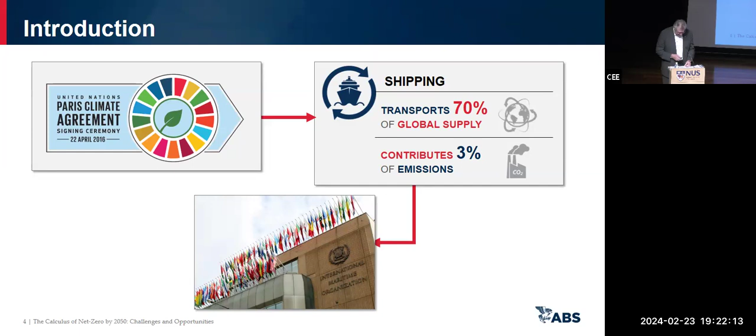So you're going to hear a lot today. We're going to be talking about a new language of shipping. We're going to be talking about what the calculus of net zero by 2050 means. We're going to be talking about CO2 and greenhouse gas emissions per ton mile, dollars of CO2 and greenhouse gas emission reduction per ton mile, and CO2 emission per transport work.

We're probably also going to be talking about a whole new color scheme for those that aren't aware of it: gray, blue, green, and pink. We're in a really exciting time, ladies and gentlemen. We're really in the early innings of a decade of change.

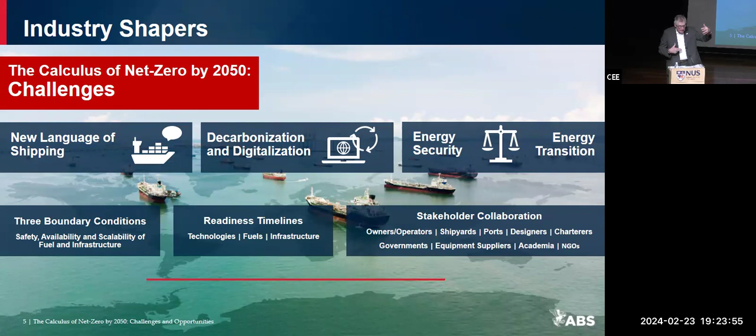We're talking about decarbonization as well as digitalization coming together to probably be the two most transformative technologies that are going to affect us. We're talking about a new set of boundary conditions: safety, availability, scalability of fuels, and infrastructure. We're talking about new timelines, a lot of very interesting things, even new relationships and partnerships. We're not talking just about the ship, we're talking about the ship and the port. We're also talking about new public and private partnerships. So there is an awful lot going on as we begin to prepare ourselves for this journey to 2050. Let me talk a little bit about where this starts.

Regulations driven by the IMO, which is essentially an arm of the United Nations responsible for setting global regulations for shipping, since shipping is essentially a global industry, has already started to address what are those signposts and outposts that we need to look at as an industry to begin making investable decisions to get us to where we want to get to.

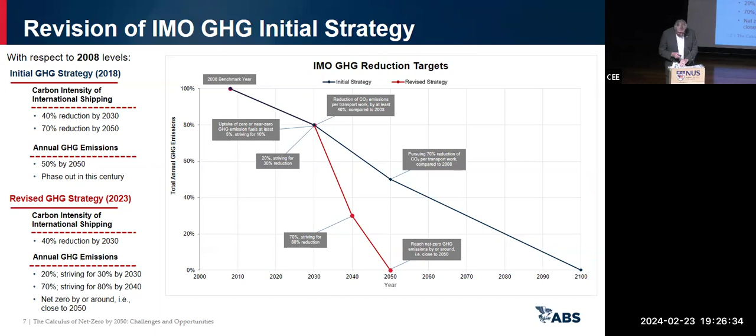In this process that supports these regulations and this journey, we're going to talk about how we're going to move down that red line. IMO has also introduced several markers on the table that are going to help guide us, help us implement the programs, and hold us accountable as an industry to see how we actually drive change. We're going to talk about a couple of them here. There's a lot, but the two that I think are the most important are the EEXI, which is the Energy Efficiency Existing Ship Index, and CII, which is a Carbon Intensity Indicator. They introduced some other things relative to well-to-wake emissions, and there's some things like market-based measures. But I wanted to bring these two out because these are the ones that I think really begin to impact operations and design.

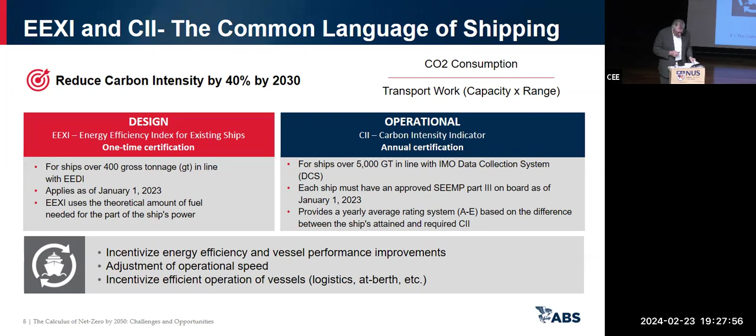Both of them are based on a relatively simple equation. In the numerator, it is CO2 consumption, and in the denominator, it is transport work, which is really a function of capacity times range. The way this works, if you are a ship owner or you look at the global fleet, the EEXI is essentially a one-time certification benchmark that kind of sets the playing field. And what happens is, as the industry moves forward, all eyes and attention are drawn on the carbon intensity indicator, because that is now going to be measured on an annual basis. The industry and ship owners are going to be required to report that and send it to the governments and regulators in order to show whether they are in compliance.

What has happened in this industry is the CII is not just a regulatory compliance mechanism. What we are seeing now is that banks, insurance companies, different parts of the industry are also embracing CII as part of either financial requirements, if you are financing an asset, or if you're looking for a contract, let's say from a charterer. The most important thing to take away is this carbon intensity indicator is going to bring the entire industry together, and it is going to be the mechanism we use to make decisions, whether it's how you operate a vessel, how you design a vessel, the selection of fuel type, or technology for retrofits. All of it basically boils down to this CII indicator. Very, very important.

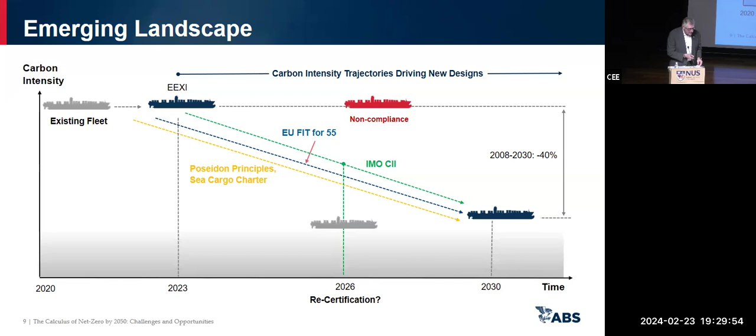The last thing I want to say about regulations - one of the things happening is that regulations now are not just compliance requirements, they're actually becoming global shipping shapers. This is the first time we've really seen that in this industry. This regulatory framework that ships are subjected to will have key elements and key timelines. There is a governance element, and the challenge for all of us is how to sync it, because you have international requirements, which is IMO, but also national, regional, and local. The challenge for shipping is to bring all those together, because in the absence of syncing this up, this fabric will not work.

We have international regulations, we have regional regulations - the EU, the US, China. Everyone is now stepping together. So the challenge for the industry, aside from just what happens on the ship, is how do you bring all these regulations together to provide one synchronized roadmap for shipping with one timeline.

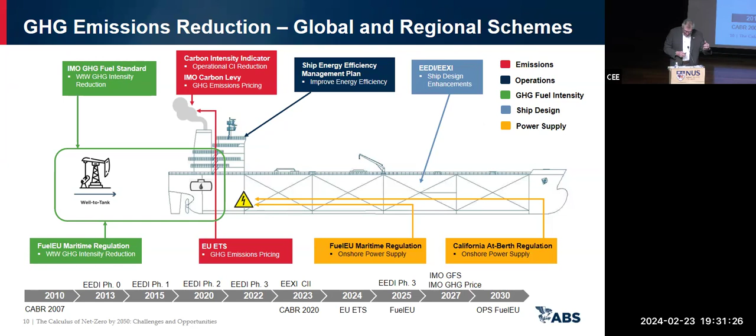So now let's talk about what it's going to take to get to net zero by 2050. I'll tell you that when you look at the red line, that roadmap that came out of IMO in 2023, getting to 2030 is actually quite achievable. We have a pretty good clear line of sight. We know where we're going.

Mark raised a good question. I don't know how many hands were behind me, but to get to net zero by 2050, at this point - and you'll see this over the course of this lecture - it's at best directional. There is no clear line of sight for us as an industry to get from where we are to net zero by 2050. Just a lot of pathways and a lot of work that has to happen.

To give you a sense of the urgency of the problem and the magnitude of the challenge, here are some statistics. From a fuel point of view, to get to net zero by 2050, we'll need a combination of probably 70% zero carbon fuels and 30% carbon neutral fuels. Now, 70% zero carbon fuels means we need 10 times more renewable energy than we have today. 30% carbon neutral fuels requires us to have 100 times more carbon capture capability than we have today. We'll get back to these terms and what they mean, but this is pretty significant when you look at what is defining the steepness of the curve.

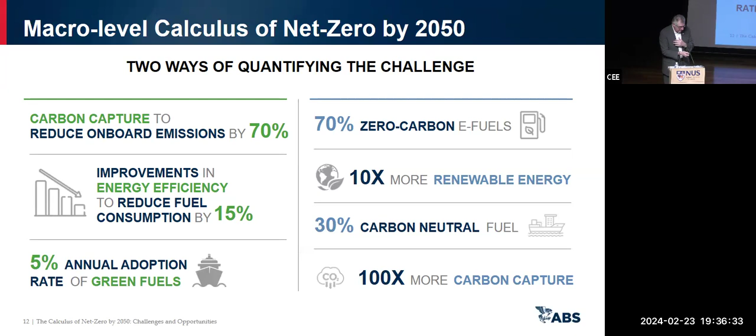If you look at this problem not from the macro perspective I just talked about, but from what I call the deck plate perspective, in terms of what is out there today, this problem basically breaks down into what I call a 70-30 solution.

Yes, 70% of the solution to get us to net zero by 2050 is the fuel, or the fuels—and there may not just be one, as we have today. 15% has to do with retrofits and bringing in new energy efficiency technology on board the vessel. The other 15% is how we use data, data science, and data analytics to help us optimize the performance of the vessel.

So what you see on this slide is that 30% of our ability to develop a solution is in our control—it's not a one-dimensional solution, it's a hybrid solution. What I'll try to do this evening is break out what's in the 70% bucket, what's in the 15% bucket, and what's in the other 15% bucket relative to data.

For all the engineers out there, what I'm going to tell you is the exciting part: when I was growing up, shipping was basically a relatively simple single-point design. Now you're looking at multi-point optimization. When I was a naval architect, it was pretty easy—you design a ship for one speed, one draft, and that impacts the whole shape, the bow, and the engine capacity.

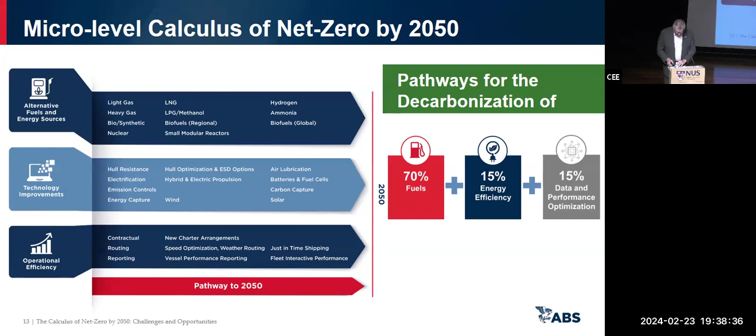Now let me continue my deeper dive and actually talk about what's behind the 70-15-15 kind of hybrid solution. We're going to talk about fuels, ship technologies, and transitions and timelines.

Ships today currently run on heavy fossil fuel. There's a C—a little bit of this story will be about molecules—there is a C in that fuel. As we look forward at what options and fuel types are available that could help this industry moving forward, what you see on the slide: it's not so easy.

There is a lot of criteria we have to meet. We have to address availability, scalability, and affordability of fuels. We have to address the infrastructure—is it there to provide the fuels for the vessels? The bunkering stations, basically global gas stations, pre-positioned all around the world, of which Singapore is one.

And it's going to require an understanding of safety—making sure that as we move into this new generation of potential fuels, we understand the unintended safety consequences of change and of these fuels.

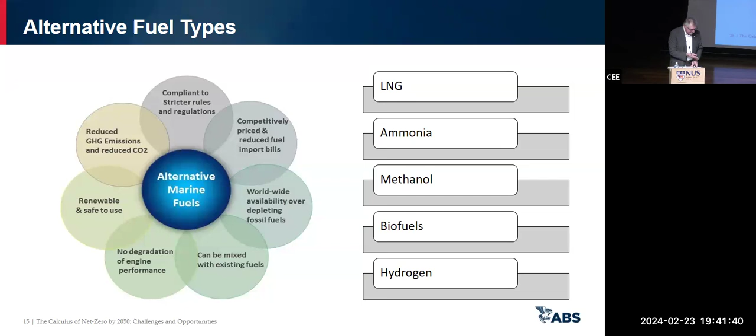We talked about infrastructure, and I wanted to talk a little more about not just tank to wake emissions, but also well to wake, because IMO now is moving this discussion of fuels past the engine room, past what in the industry is the tank to wake piece. They are now challenging the industry: you've got to pick a fuel that goes from basically well to wake.

So as we look at this compliance requirement, the greenhouse gas emissions and CO2 reduction is not just what's on the ship that the ship is emitting. It is what is happening in that whole process to produce that fuel and bring it to the ship, and that is what we call well to wake.

And then what I did here is also begin to get a sense of what is the cost in terms of impact on shipbuilding, to give you a sense of readiness and timelines. I'll say, by the way, in the shipping industry one of the big indicators for types of fuels used are the engines.

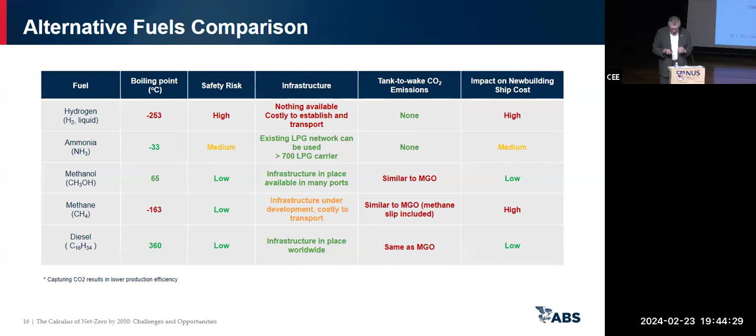So the ammonia and hydrogen currently today are what we call gray. They come from fossil fuel. And the challenge is, how do we make all this work? We will talk about ways like carbon capture, which is extracting carbon from some fossil fuel activity, and we'll look at these generations of how these fuels can reconfigure themselves.

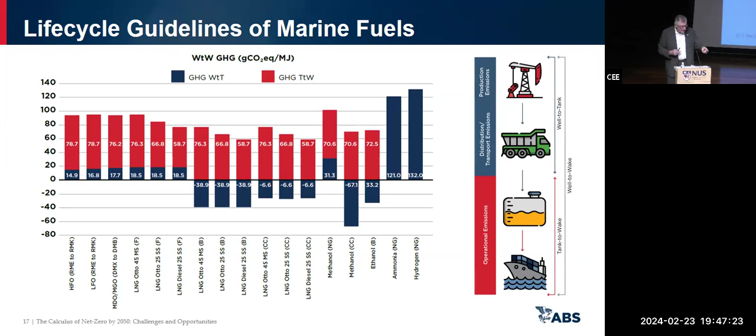The reason I bring this up is because if you are a ship owner, in addition to the requirements of compliance based on a technical equation, the regulators now are enforcing cost of compliance, or market-based measures, or dollars. So you're now also going to be paying penalties, and the penalties are focused on the life cycle performance of the fuels. Pretty interesting stuff. We're just getting started here.

Just to give you a sense of what this industry is wrestling with: if you were to order a vessel today with conventional fuel, per the requirements, that vessel can go 10 years without any rating change that would cause a compliance problem. If that same vessel was ordered with LNG, you could go 20 years. And if you used methanol, you could go 15.

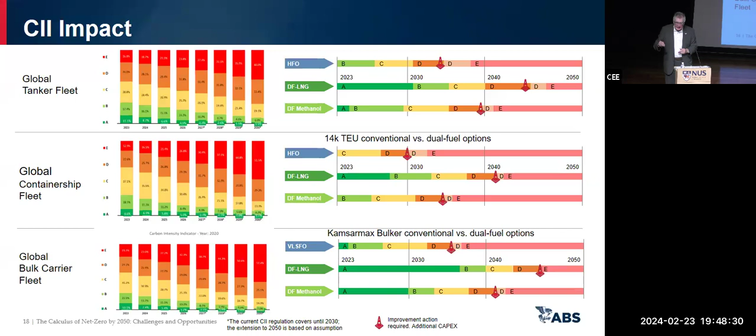The reason I'm telling you this is because from an engineering point of view, in terms of how to begin making that decision going forward, there are a lot of levers and things at your disposal to optimize this problem, not just in terms of regulatory compliance, but also technology readiness. And I'll add one more dimension: risk. We'll talk a little bit at the end about risk.

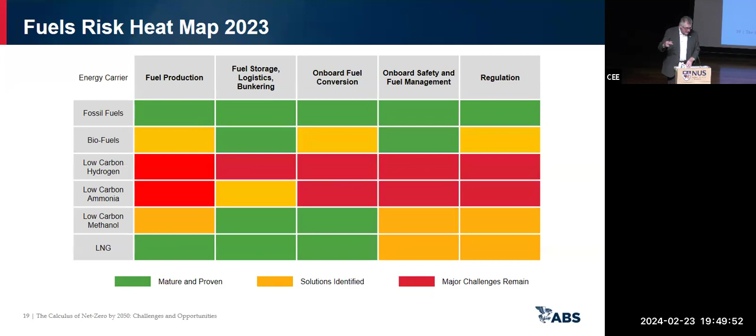When you start looking down, you will see the biggest risk challenges and the biggest gaps are with the fuels that do not have a carbon atom in there - hydrogen and ammonia. That's the challenge. So you really begin to understand, from a risk versus risk point of view relative to everything going on, how this all shapes up, and then what we need to do to manage and mitigate this type of risk.

Let me talk a little bit about ammonia safety. Toxicity of ammonia remains, I think, the defining safety challenge of this fuel. If you look into the literature, any dosage of 300 parts per million, if you breathe in any of that, it's harmful. And even as low as 35 parts per million, if you were exposed to that, it would be dangerous and certainly unpleasant.

But we have the ability to understand this and begin to see what we can do to put a fresh focus on safety in the case of ammonia. Listen, we can put a man on the moon. We can clearly begin to understand what is going on with ammonia and what that new safety environment looks like, both on the ship, in the engine room, as well as at the bunkering facility outside the ship.

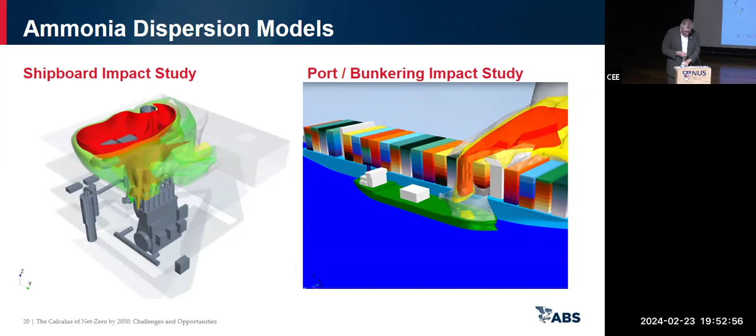So this is a solvable problem. Like everything else with these new fuels, it's a challenge and is going to require a new approach to thinking, and it's going to require all of us to really use the technology we have available to understand this. Remember, one of those boundary conditions I talked about - there are three of them - is safety. Safety, safety, safety. What are the unintended consequences of change, especially related to safety? This is a good example of what we see and what we're working on.

So that's a little bit about that 70% bucket. I've got two slides - let's talk about that 15% bucket of energy efficiency, that low-hanging fruit.

What I want to show here is that modifying existing vessels to improve CO2 and greenhouse gas emissions, in fact, can be done. You have a whole portfolio of technology you can apply today, everything from hull form improvements to reduce resistance and improve propeller efficiency, to renewable energies, to batteries, to minimizing onboard energy consumption, machinery optimization, and electrical energy storage.

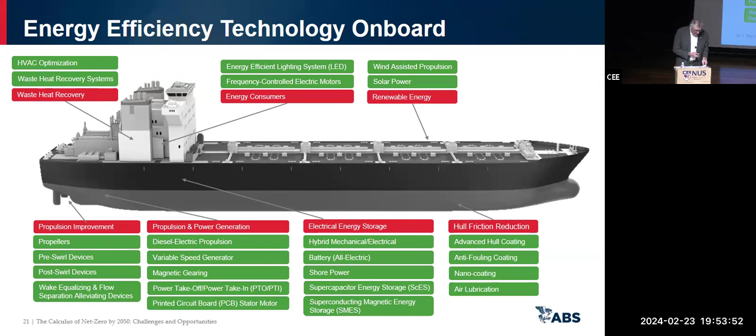Let me go right into the data piece, which is very exciting and very important: how do you bring data into this picture? From a vessel point of view, based on voyage performance and voyage optimization, you can improve CO2 reduction and greenhouse gas emissions through the combination of speed and performance, as well as using sensor information to tune a machinery component to help you out.

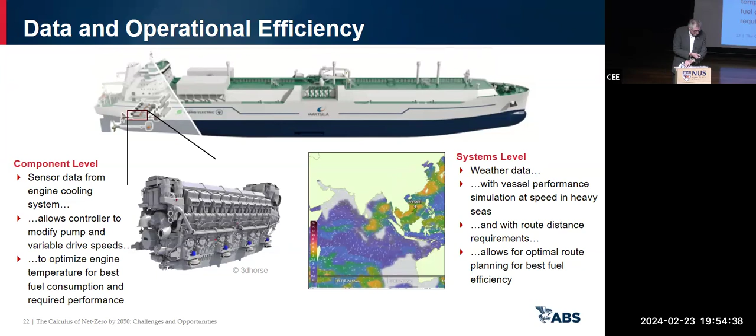So 70, 15 and 15, or that 30%, is something that can be used today. I'm going to move through this relatively quickly since I've lost a little bit of time. Let me just give you a glimpse of the future.

In our outlooks, on the left-hand side you can see blue dominated, quite frankly, by oil-based fuels. But based on our assumptions, as you move towards 2050, you're going to see a new fuel mix that is not dominated by oil. On the right-hand side, it's going to be about 21% oil, about 11% LNG, a little over 1% LPG, 40% methanol, and 28% ammonia and hydrogen. So you can see how that mix is changing.

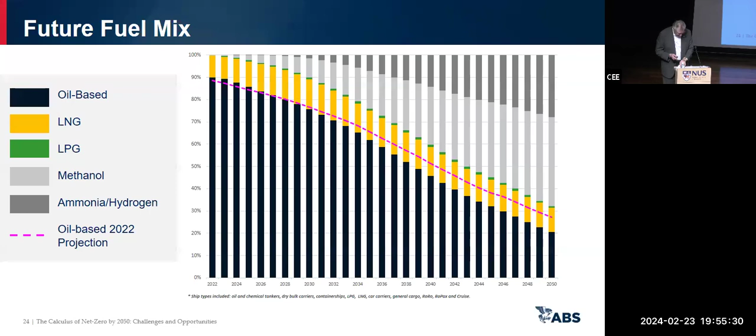I'm going to run through three slides and close this down quickly. But what I want to leave you with is, as you look forward, it's important to look at the types of fuels on vessels and how you get there. Three value chains are emerging that are really important, because these value chains are not only going to drive the type of fuel you put on ships, they're going to drive economies. If you Google it, you'll see Morgan Stanley, Goldman Sachs, any of the big banks talk about the new carbon economy, the new ammonia economy, the new hydrogen economy, and how that moves forward.

The exciting thing is that we've talked a lot about how to reduce CO2 emissions of ships, but shipping is now going to be carrying ammonia and hydrogen to support government clean energy transition programs. They're going to be carrying liquid CO2 pulled out through carbon capture and stored somewhere, and this is also going to generate economic value. It's really important because shipping is going to be a big enabler in this process.

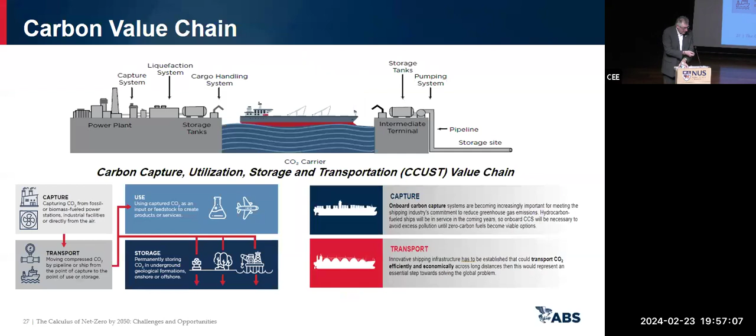That's all I'll say about that since I'm running out of time. So what I really want to do is get to the very end here. I want to talk a little bit about transformational technologies, because it's not just what's in the engine room and the combustion engine, but I want to throw out two terms for you to keep an eye on.

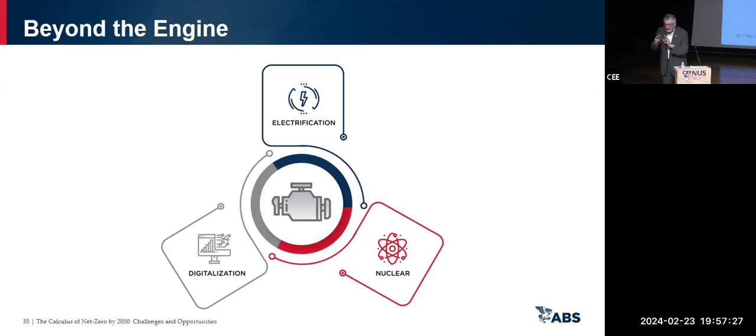Electrification and nuclear. Nuclear is very interesting because, quite frankly, you have a whole new generation of small modular reactors completely different from what I think we all grew up with. On the left, you see the reactors you'd associate with Chernobyl, where water is the coolant and you have highly enriched uranium fuel. But on the right, you have a whole generation of microreactors where salt is the fuel and the coolant. When you look at passive safety from that point of view, it opens up a lot of opportunities.

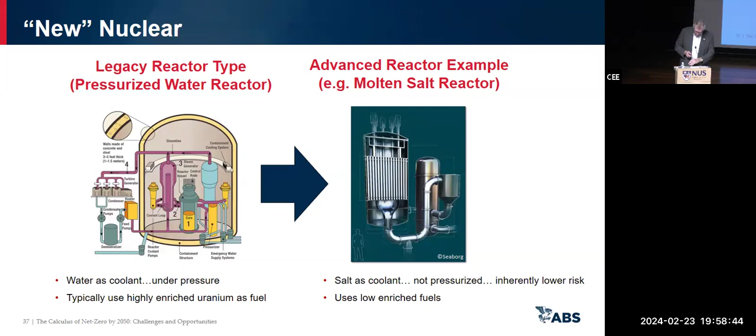And the nuclear story is actually two stories. It's not just the reactor that goes on the ship. From a propulsion point of view, there's a lot of activity about putting these small advanced reactors, in this case a molten salt reactor, on a barge or an FPSO somewhere to generate pink hydrogen to feed into a city's electrification power grid. So I wanted to share that with you.

The only thing I want to mention before I close is not to discount the other big transformational technology out there in addition to decarbonization: it's digitalization, it's autonomy, it's artificial intelligence, it's using digital twins to help us understand and predict response. These are things that are also very transformational and are going to be part of the solution.

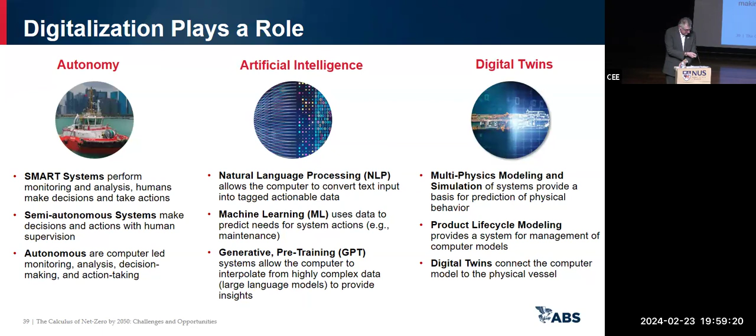So let me close by focusing this back on all of you, because I think this is really important as I close. The question I'm closing with is: how do we turn challenges into opportunities?

What do we do when the problems are real, the stakes are high, time is short, and abstract answers are inadequate? What is the real chemistry for success? And what is the real fuel of the future?

Let me start by talking about risk, because this is going to be a mindset for all of you as you move into these early innings of a decade of change. You need to be comfortable embracing risk. And it's not just risk, it's dimensionally risk versus risk.

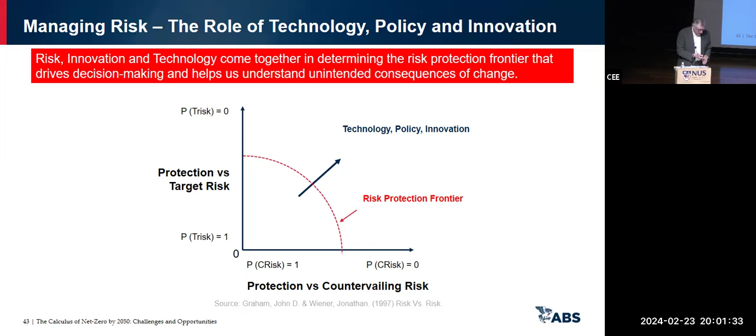Very important. Closing this thing out, let's talk about people, about everybody in this room. For those of you studying, let me tell you, the talent equation is changing.

When I was your age, the ability to develop talent was based on age, experience, and training. Now, when you look at decarbonization and digitalization, that equation is changing. It's about skills, it's about continuous learning, it's about systems thinking, similar to the risk versus risk slide. The key is continuous learning, the ability to continually become continuous learners.

That's very important for all of you students, as you move into work and into the corporate environment, employers will value continuous learning. It's important because you're moving into an era where technology is changing quickly, and you've got to be able to adapt.

Second to last slide: success is a team sport. I told you commercial gravity alone is not going to get us there. You're going to see a whole new generation of public-private partnerships, a whole new generation of working together.